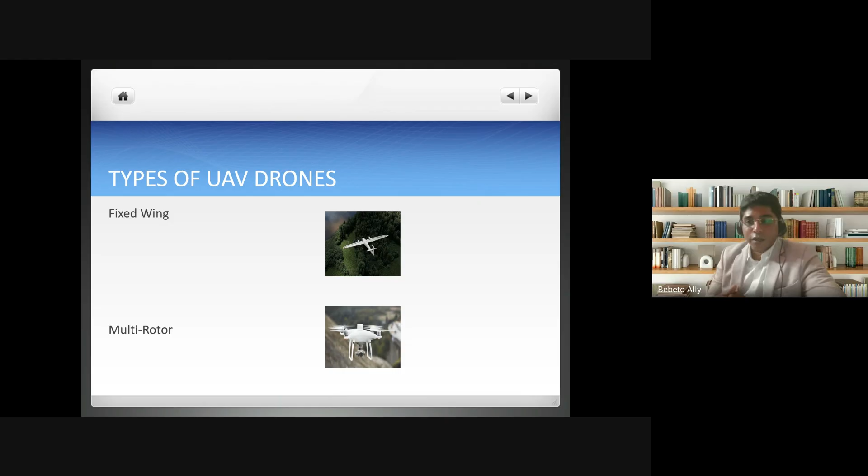As I mentioned earlier, the drone market is going to reach approximately $40 billion by 2026, and it is going to approximately double by 2030, which is $80 billion.

Now, drones are being used in civil and military applications. In the civil sector, we are using it for policing, civil defense, and extensively for agriculture, especially through a few schemes launched by the Honorable Prime Minister, which is the Namo Drone Didi scheme, where farmers, especially self-help group farmers, are being taught how to fly a drone, provided a drone with subsidy, so that they can use agriculture drones instead of manually going into the fields for spraying fertilizers and insecticides, which is very harmful for their health as well.

This is also giving them an employment opportunity, and helping them become entrepreneurs and earn a livelihood from the drone by providing agriculture spray services. They are also being provided with DGCA certification, which stands for RPC, Remote Pilot Certification. It's basically a legal certification or license provided by DGCA to legally fly a drone anywhere across India in civil airspace.

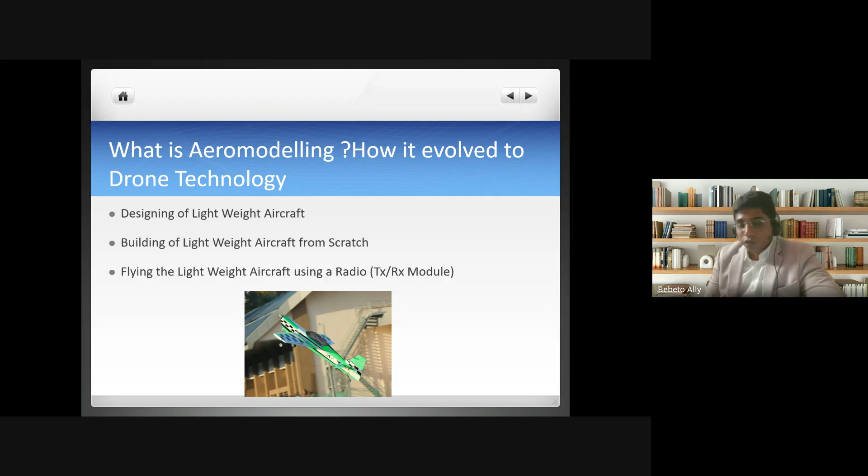Most engineering students might be aware of events organized in IIT called the Boeing IIT National Aero Modeling Competitions, organized across all IITs, with one zonal competition and one national competition held in either IIT Delhi or IIT Madras. This competition is backed by Boeing, and Boeing has been doing it for almost two decades now to promote indigenous development in India.

These model aircrafts are not just for any competition. It is for seeing which of the designs can be taken up for the next proper aircraft design. Boeing comes up with new aircrafts almost every year, taking up new prototypes and new concepts. So all these ideas, the bright minds, are drawn from thousands of designs that come across the country participating in these competitions, which gives them the idea of what kind of aircraft can be made in the future.

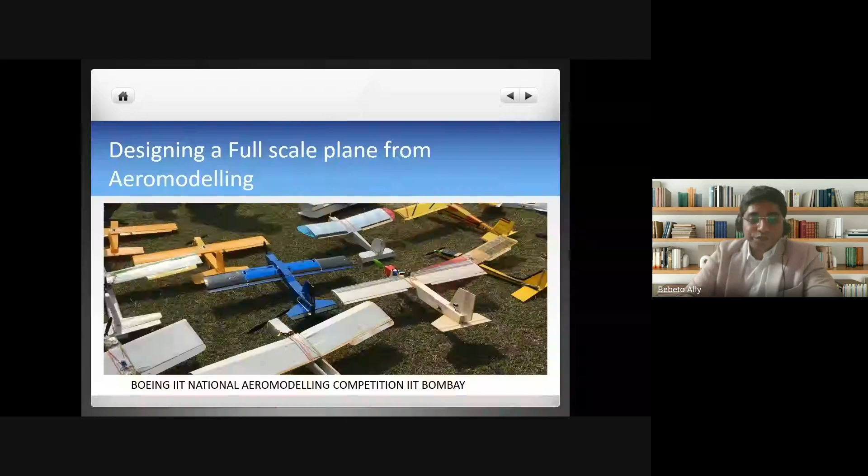In aero modeling, as I mentioned, you need very basic components. One of the first components is the TXRX module, which is a radio consisting of one transmitter and one receiver. The receiver is mounted on the model aircraft. You also have one battery, one BLDC motor, and one electronic speed controller, and that's all that's part of the electronics in a model aircraft for aero modeling.

It's a very simple technology. How it flies, you just need to mount these three things: BLDC and ESC. ESC stands for electronic speed controller, and BLDC means brushless DC motor. These are the three basic components that have been used over the last three to four decades to do aero modeling designs and check the aspects of the aircraft in a scaled down manner, which later evolved into a competitive term, as I mentioned about the Boeing IIT competitions, and also the SAE International, which is held in the US. There are many such events happening over the years. So this is the basic component.

Now, when we had this technology over the years, why didn't we have UAV technology developed the way it's popular today? Why didn't we have it way back, say 15 or 20 years back? Let's move to the next slide.

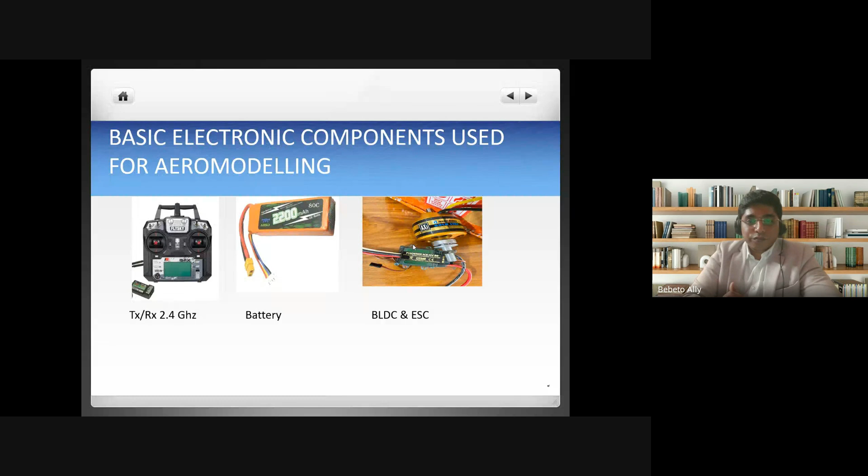So it is something that has revolutionized and made flying drones and aircrafts much easier, which was not possible because all these years without an APM, flying an aircraft or an RC multi-rotor was all manual. It was all about balance, precision, and practice.

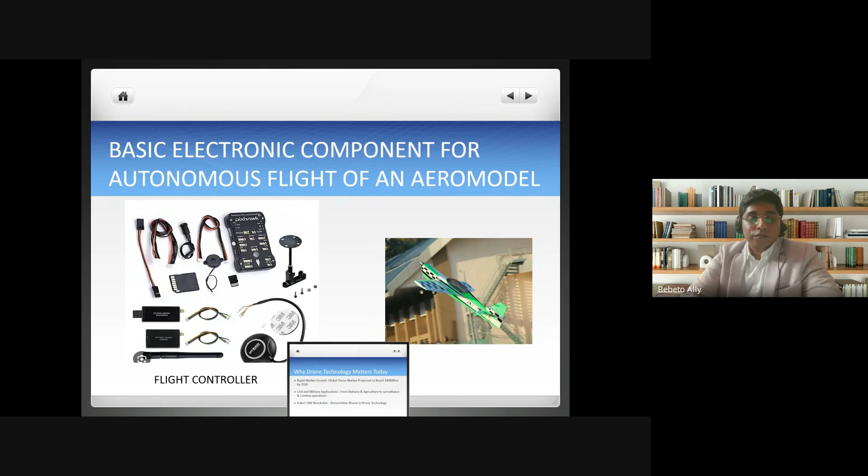As I mentioned earlier, in the early days, maybe 6 to 7 decades ago, we never had such technology, so aero modeling was being done. But today a scaled down model, or sometimes for the unmanned aerial system the exact model, is placed inside the wind tunnel so that we can do such testing.

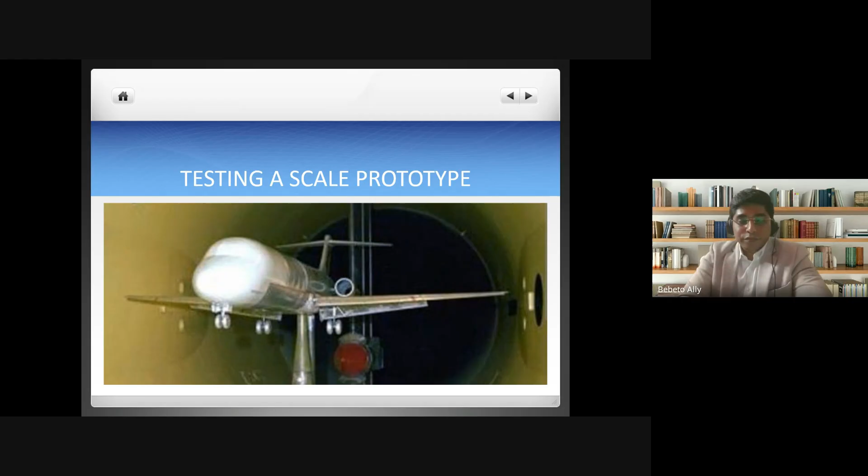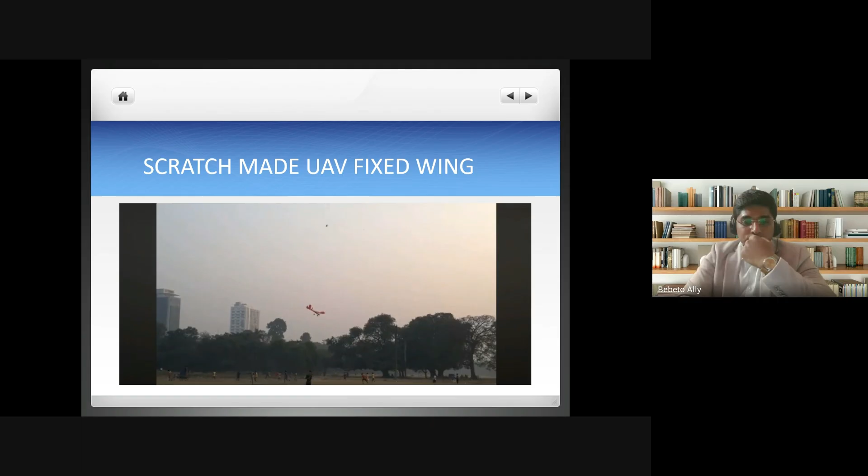As I mentioned earlier, this was manual flying, where you don't have an APM, but it's all about practice and precision. If you don't have practice, you're unable to fly this aircraft. So once the APM modules were innovated, flying such aircraft became easy.

But earlier, maybe a decade ago, students used to make their own planes - this video is from 15 years ago, flown in Kolkata Maidan. This aircraft is all manual flying. In those days, when engineering students made such aircraft, they used to face a lot of trouble flying it because they lacked the flying skill.

But today, after the innovation of the APM, which is auto stable, it does not require you to maintain stability. All you have to figure out is where you want to fly and when you want to fly. So this is where the advantage of an APM lies, and that has revolutionized the industry.

As I mentioned, globally it's a $40 billion industry, which could have been achieved a decade or 15 years ago if we had the same technology - we just didn't have the autopilot modules.

So I'll just mention the types of wings that are there for a fixed wing aircraft. One is the dihedral wing, one is the flat wing - you must have noticed this in trainer aircrafts like the Cessna.

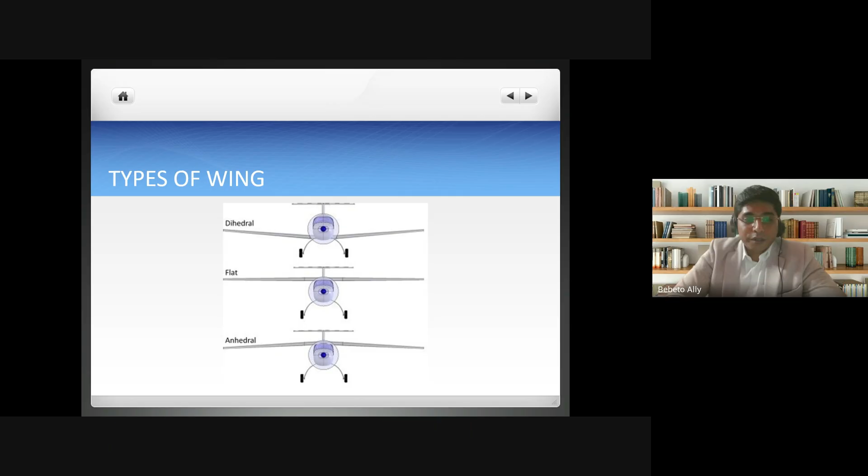So basically, I'll discuss the types of multi-rotor. One is the quad, which is commonly used. It has 4 axes. It is normally used for photography or other small things.

Then we have the hexacopter, which has 6 axes, meaning it has 6 BLDC motors or 6 propellers which help it fly. These are mainly used in the agricultural sector, like agricultural drones. You also have it in defense, and for various other purposes.

Then we have the octa, or 8 axis. This is very rarely found on a large scale, other than for air mobility, like air ambulances and air taxis, which have been configured in octa configuration to generate more thrust.

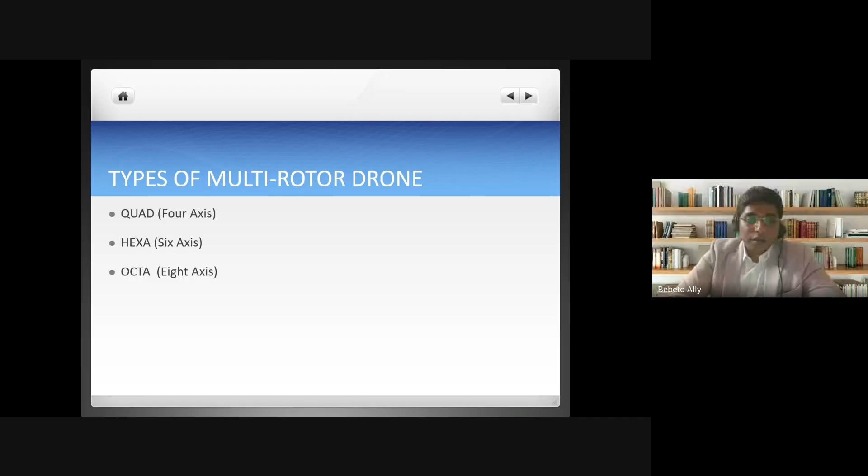So I'll straight away play a video of this heavy lift multi-rotor.

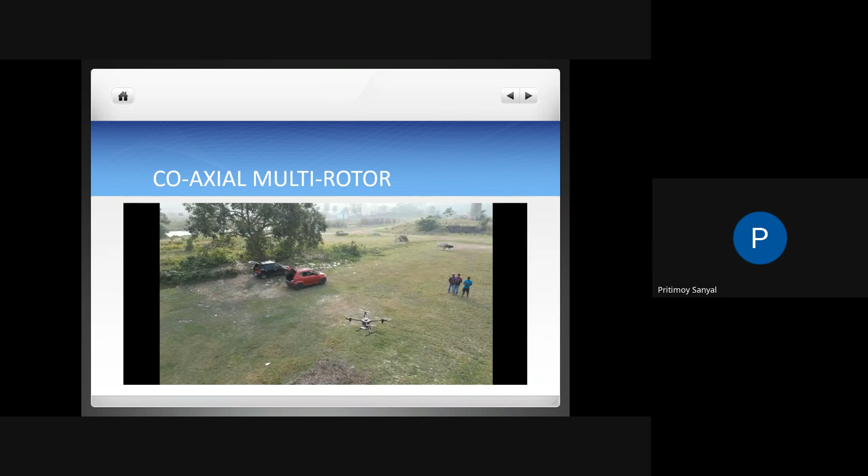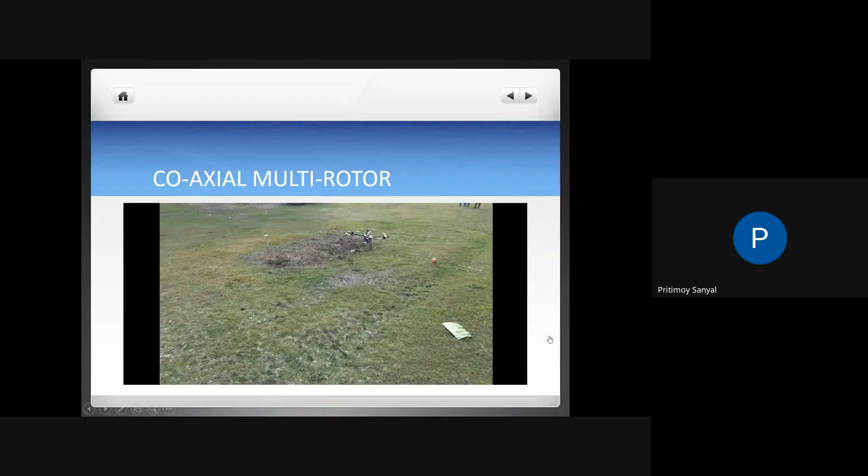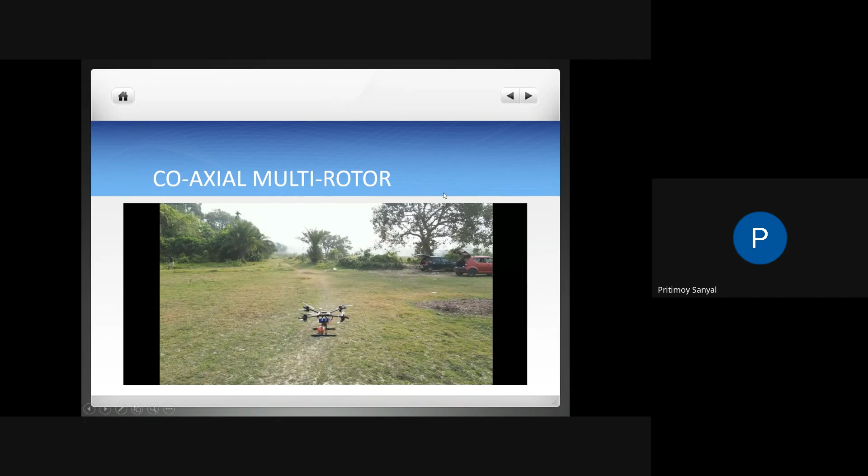Mr. Ally, please unmute your microphone. Hello. Hello, yes, now you are audible. Please, yeah, was the video visible? Yes, it is visible, but there is no sound in this video actually. Sometimes you mute your microphone, so therefore... No, no, there is no sound.

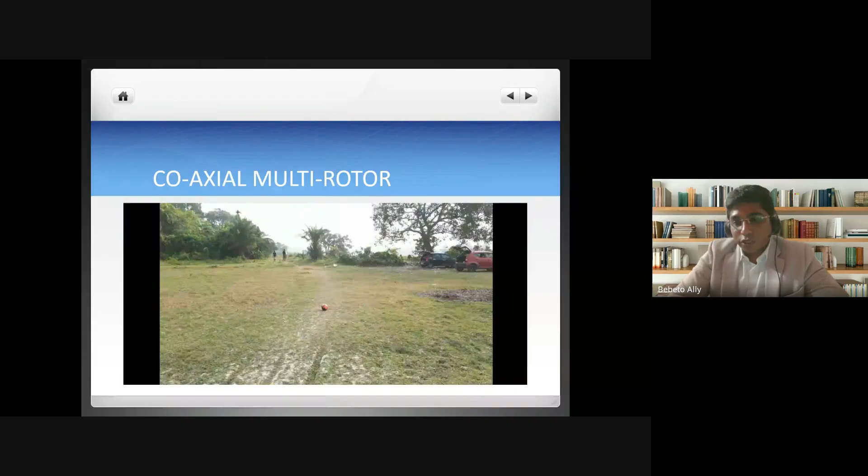As you have seen in this video, this is a coaxial heavy lift drone designed for payload dropping. This drone is capable of lifting weights up to 25 to 30 kg. Right now, it is going to drop a payload of 5 kg. So this is a coaxial configured quad.

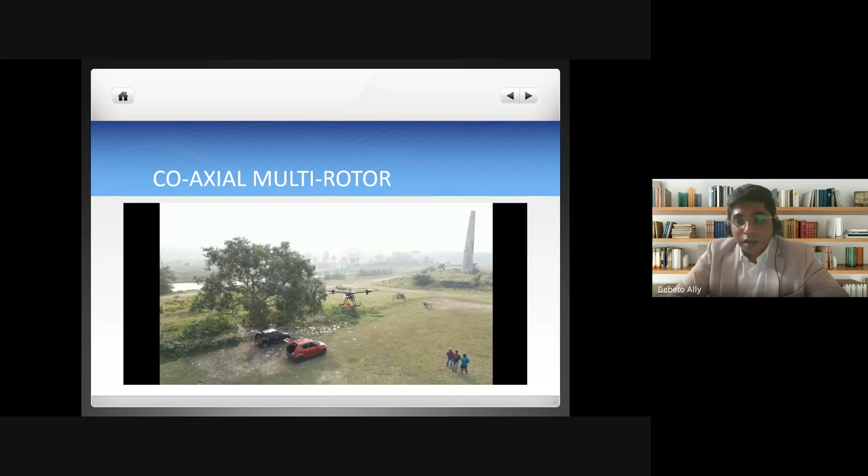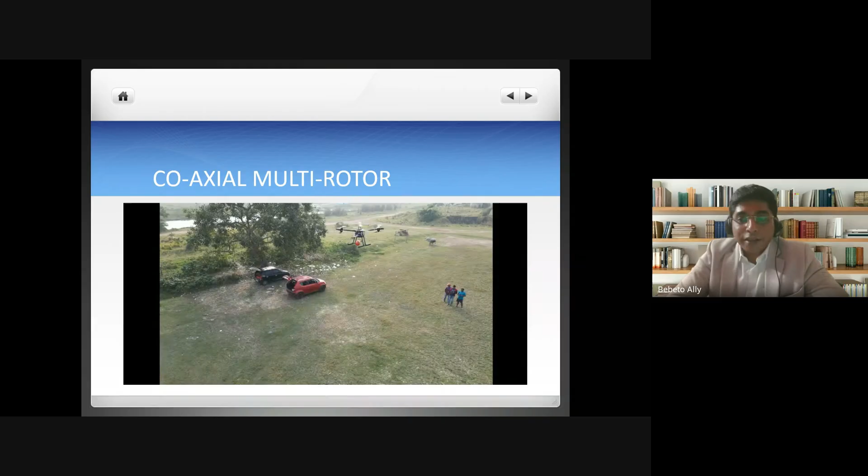As I mentioned earlier, hexacopters are designed for bigger drones, but this drone is designed as a quad in a small configuration while generating more thrust than a hexacopter of its category. So there are various such categories of drones that help you perform your functionality according to your requirement and your flying time.

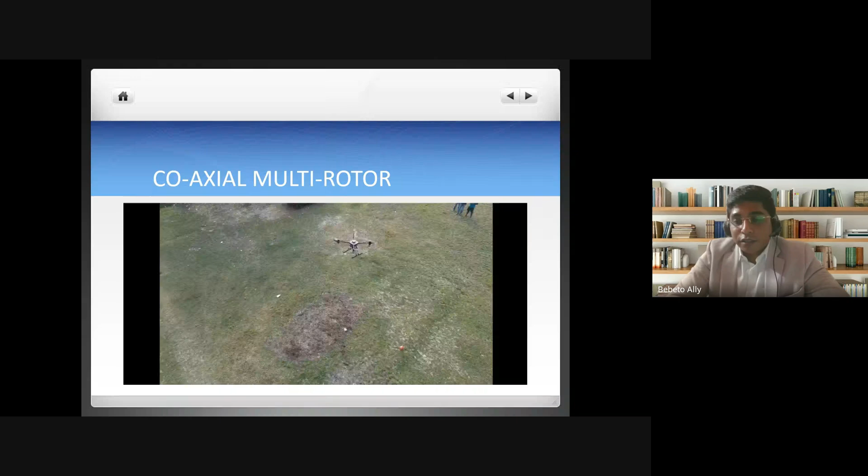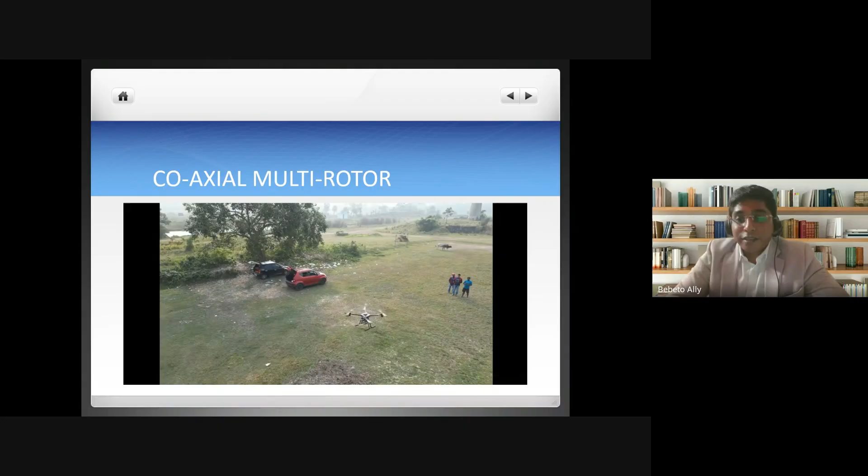So basically, when you design a drone, first you need to think about the structural aspect, the kind of payload, the volume of the payload, and the flying time. It's important to calculate your battery, whether the flying time you're planning for with that payload and structural load your drone can withstand, what kind of battery you'll need, and what your circuit diagram will be.

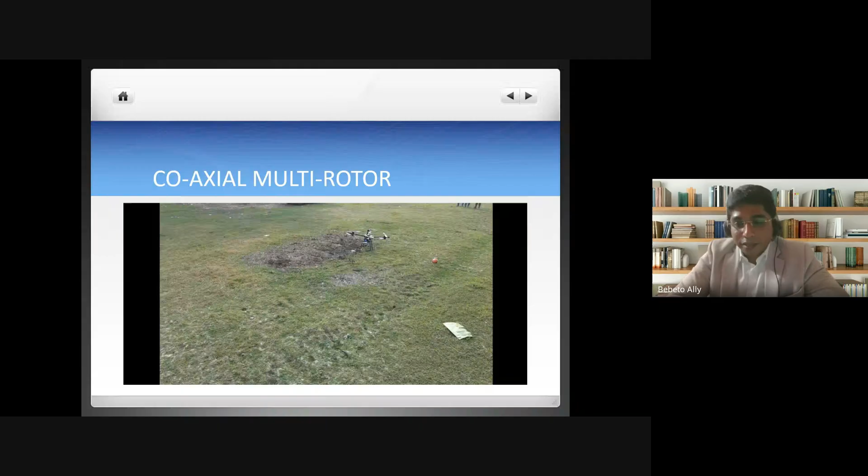So students who are interested, I understand that's why they're attending this workshop today. It's very important to know your requirements and your payload before you start developing a drone. So I'll straight away come to the next slide.

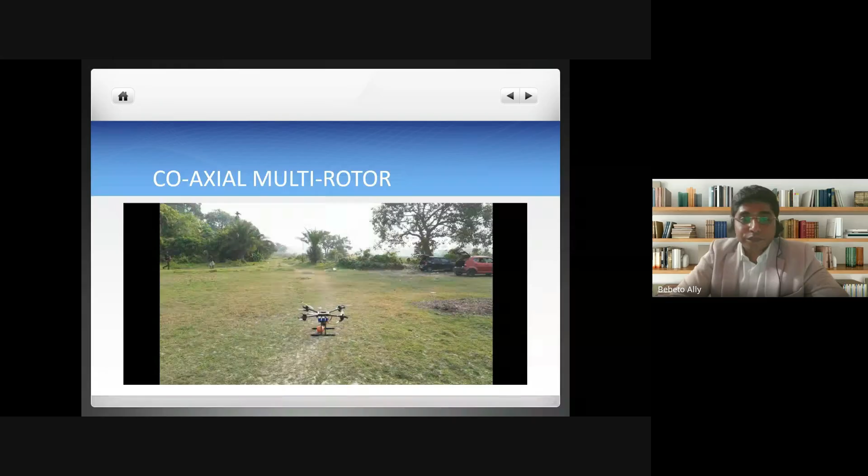So the main electrical components of a UAV, as I already showed you the pictures of the basic components and the autopilot module. I mentioned about the BLDC motors, but there is also one more thing, an IC engine - an internal combustion engine, fueled either by aviation fuel or methanol. These are the two forms of fuel it runs on, but it is very rarely used because we are trying to promote greener technology. But in some defense operations, we need IC engines to gain that kind of speed for supersonic or hypersonic missions, the prototypes of which are in development. For those things we need a more powerful engine. But an IC engine UAV is also used in defense for various purposes.

Now, ESC is an electronic speed controller. As I mentioned earlier, it controls the speed of the motor, getting signals from the RX module. Then you have the autopilot system, the APM module, which is an integrated version with internal gyro and everything, which maintains your flight path for a stable flight - that's very important. Then you have the GPS, which helps you find your location, and it's part of the APM module. Then the propeller and the structural frame. These are the main components of a UAV.

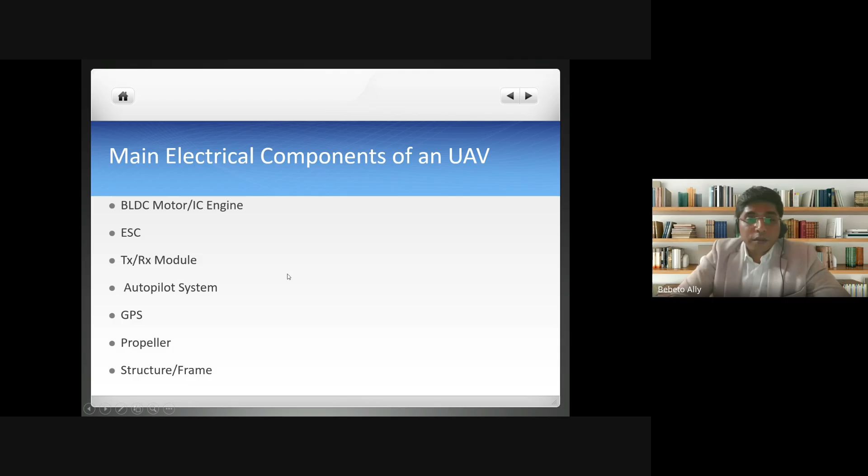So as I mentioned about the materials - aluminum, carbon fiber. Duralumin is used for the landing gear section, which helps maintain structure when landing with a huge amount of payload. So if it's a multi-rotor, it has to withstand the structural load, and duralumin is very useful in that case. Then we also have titanium, which is a bit on the higher side cost-wise, but it's a very good material to construct a drone. But carbon fiber is the most commonly used material in today's drone industry.

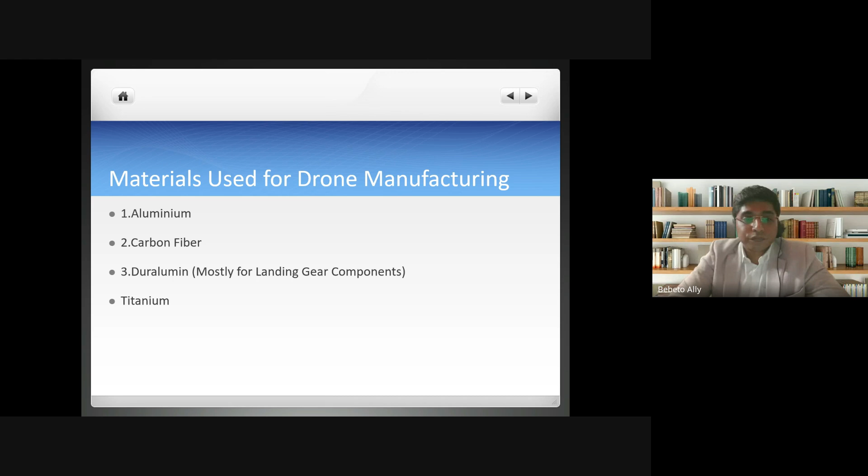So important points before designing a UAV, as I mentioned earlier while the video was playing - payload calculations are very important. You need to understand and analyze your payload, the volume of the payload, before you begin designing the drone. Then you begin designing your drone, be it a multi-rotor or fixed wing, and you need to know what category it falls in. Whether you need to travel a certain distance also matters, so based on that you need to think about the type of multi-rotor or fixed wing, whichever is applicable for that mission. The range is very important as well.

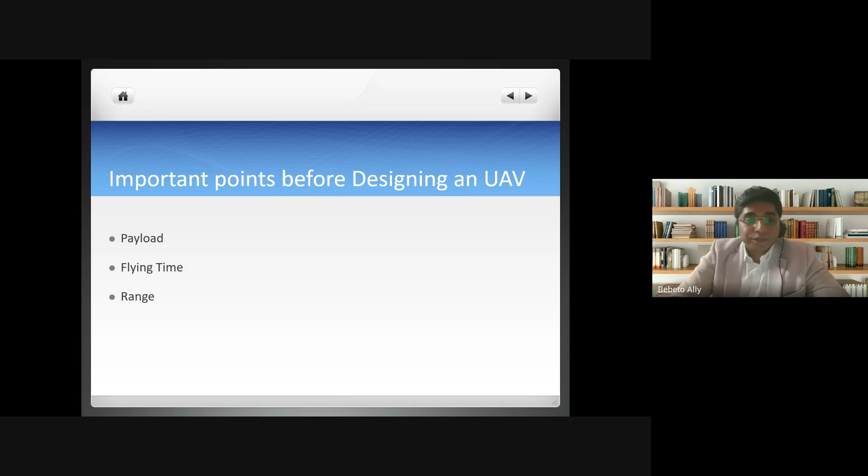So the applications mostly used for multi-rotor are aerial surveillance and photography. Aerial surveillance has become very popular in various industries - used by the police, the border security force, the coast guards, various entities like ports, and in fact today the railways are using drones for surveillance of their property and survey of railway tracks and bridges. It's a very useful tool. Drones have become very useful over the past decade, making things much easier that were sometimes very difficult before.

I'll give you an easy example: the Howrah Bridge in Kolkata, one of the oldest bridges in the country, a cantilever bridge. This bridge needed inspection for structural audit. People had to go up using traditional methods, but now using drones it has become much easier to do structural analysis. Nobody has to go all the way up to check for cracks or rusting. That's how aerial surveillance and photography has helped us do our work much more easily.

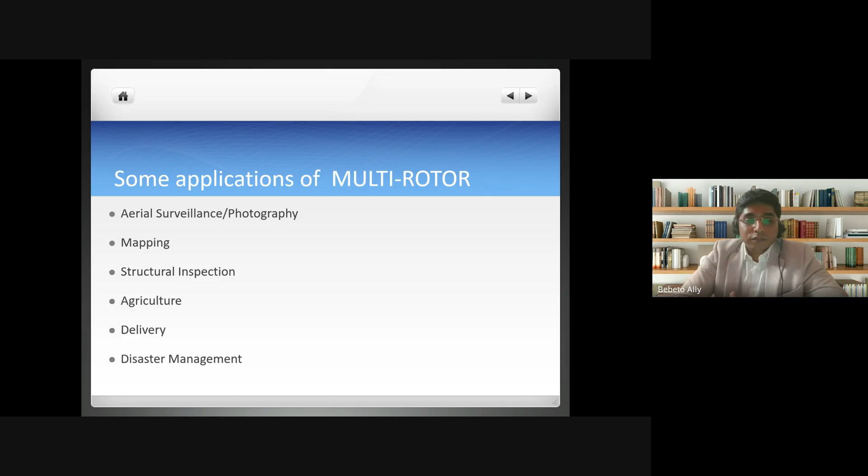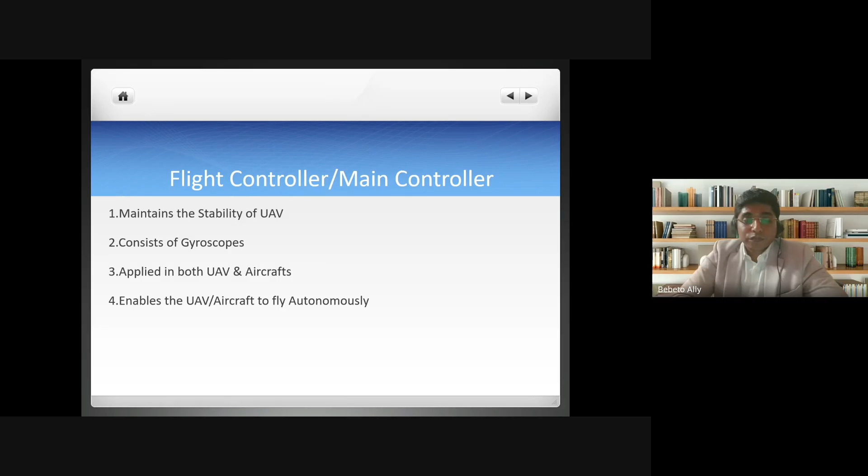Now, understanding the effects of wind is very important, because when flying an aircraft, be it a drone or an aircraft, the wind changes directions. You are going to face updrafts and downdrafts of wind, you are going to face wind gusts, and you're going to fly against the wind, which creates a lot of turbulence. So wind plays a key factor when flying a drone or an aircraft.

Now imagine you're flying a drone next to a pole or a building, and the wind is coming from the opposite direction. When the wind comes in contact at the edges of the building, it creates vortexes, and these vortexes create turbulence when flying the drone close to a building. Our APMs today are configured so that we can fly stable in such scenarios, maintaining stability at such vortexes, especially with updrafts or downdrafts - a downdraft is a nightmare for any pilot, be it in an aircraft or drone, because if it happens at a lower altitude, you get very little chance to recover from it.

So a downdraft is much more deadlier than an updraft. Updraft sends your aircraft up, but downdraft, if you're at a lower altitude, you don't stand a chance to recover.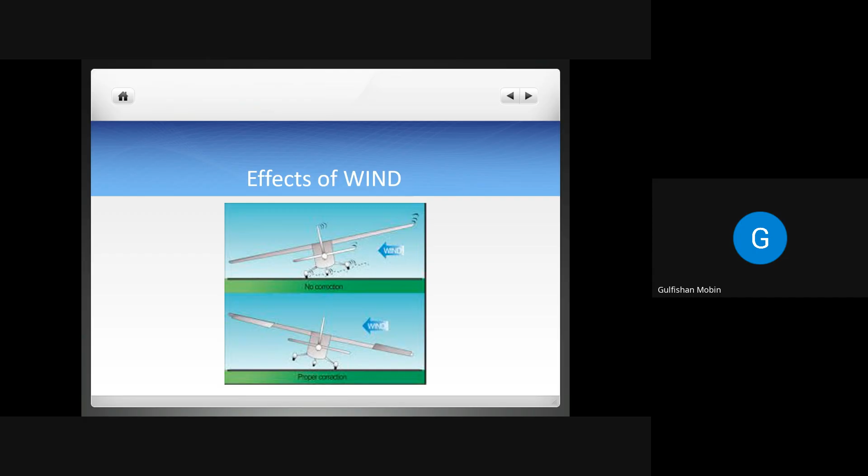So as I mentioned, the downdraft is a nightmare for every pilot. We have to be very careful, and our APM modules today are so stable that we don't even have to worry about such things. But you need skilled piloting to control and get out of these scenarios safely.

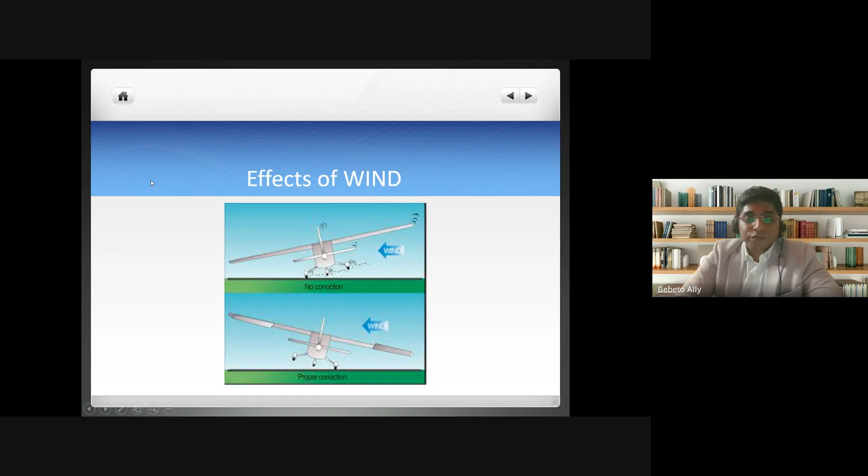So these are the main controls when you fly an unmanned aerial vehicle: yaw, roll, pitch, and throttle. This is a 4-channel TX-RX module, which I showed you a picture of when I began this presentation. Basically, yaw in an aircraft is the rudder, and it helps turn the nose right or left. In case of a drone, it acts the same way - it helps you turn the front part of the aircraft or the drone right or left.

Then there's the roll. In case of an aircraft, the roll activates the ailerons, and you can move the wings right or left. Then you have the pitch, which helps you maintain the angle of attack, whether you want to go up or descend. So these are where the three controls help, and throttle controls your aircraft's thrust, which is very important while you are doing these maneuvers.

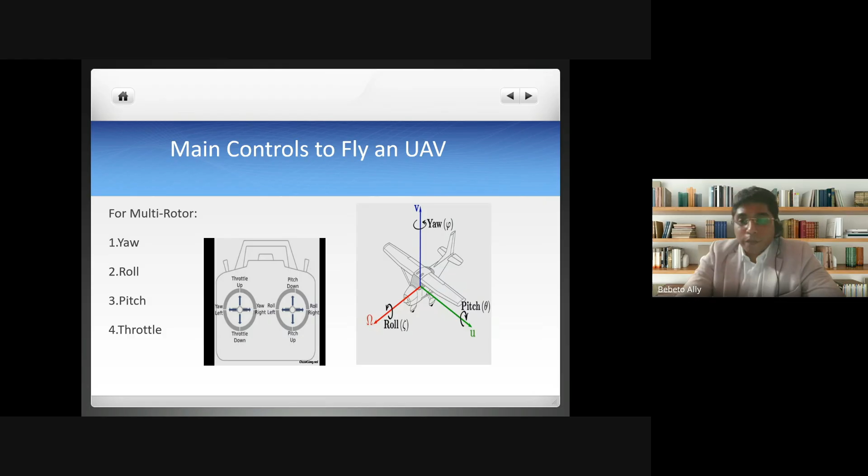Now, there's a difference between the multi-rotor and fixed wing. As I mentioned earlier, training is usually needed to fly a fixed wing, but in a multi-rotor it's easy to control and maneuver because both have APM. Fixed wing requires more training because of its speed, and you can't land it anywhere - you need to learn how to land it and take it off properly and safely.

Then you have to know about the ability to hover. In fixed wing, you can't - you are unable to maintain a fixed position, so you have to land it. As I mentioned earlier, you need to select a proper landing strip so that you can land it safely. So these are some of the key differences between a multi-rotor and a fixed wing.

But there is also one more category which combines both: a fixed wing with the capability of landing and taking off from the same location. That's basically VTOL - vertical takeoff and landing fixed wing. It is a combination of multi-rotor and fixed wing, and it can do both together.

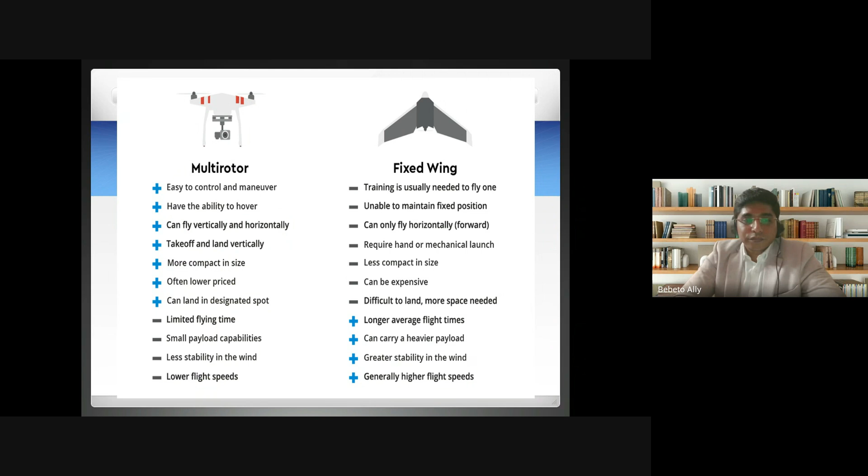So to fly a drone or an unmanned aerial vehicle in India, you need a DGCA certification and license, which is the remote pilot certification from DGCA, so that you can legally fly a drone anywhere across India. There are basically 3 to 4 categories of certification.

One is micro, which is for very small drones, from 250 grams up to say 2 kg. Then you have the small category from 2 to 25 kg. Then the medium category from 25 to 150 kg. Then the large category, which is above 150 kg - you can go up to say 500 kg or even a 1 ton drone, but that's for the large category.

But to legally fly any of these drones, especially the medium and small categories which are very popular, you need a certification from DGCA through drone academies - we have almost 100 drone academies across the country - so that you can get your DGCA certification and legally fly a drone anywhere in Indian civil airspace.

I'll also be discussing the aerospace part apart from drones, because aerospace and aircraft have helped us gain the R&D and knowledge of how an autopilot can function, and given us key ideas about how an unmanned aerial vehicle can function. From aero modeling, the evolution happened to the unmanned aerial system. Aircraft gave us the key vision that anything unmanned can also fly. I'll begin with the types of aircraft straight away.

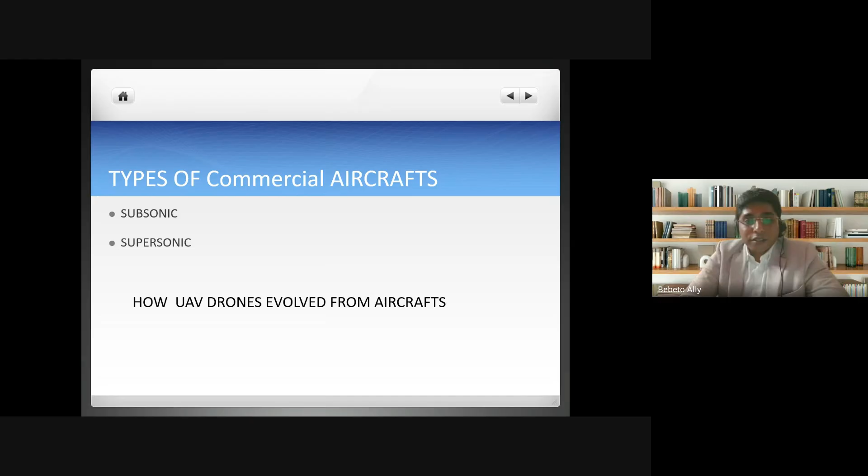I'll come straight to the first slide in this category: supersonic aircraft Concorde. This was in service for 27 years, and it was the world's first and only commercial aircraft that used to fly at Mach 2, with a top speed of 2,179 kilometers per hour, twice the speed of sound. This aircraft was the first and only of its kind operational for 27 years for commercial flying.

Usually you will find supersonic aircraft with the Air Force and defense all across the world, used for military purposes like combat. But this was the sole aircraft of its kind for its time, which retired in 2003.

It was providing services between New York and London. Travel time today is somewhere around 8 to 9 hours; in those days it used to be 3 to 4 hours depending on weather conditions. That was the fastest time you could reach between London and New York. This aircraft first flew in 1969 and was in service from 1976.

This aircraft faced several challenges during its production and service. There was an air crash in the year 2000 at Paris Charles de Gaulle Airport. Moments before it took off, another aircraft had dropped debris from its wing, which was lying on the runway.

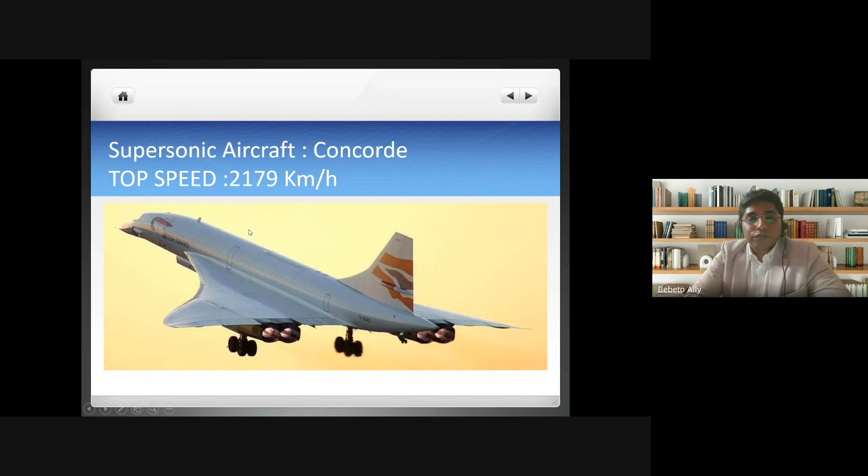These are some of the problems that were faced with the Concorde as well, or when you see a fighter jet flying at supersonic speeds. The most common problem is a sonic boom, which is very dangerous if it happens over a city. That's a main reason why the Concorde was never allowed to fly over cities, only for overseas operation at supersonic speed. When flying over cities, it was supposed to fly at subsonic speed.

Now I'll discuss what a sonic boom is. When you're flying above the speed of sound, you're crossing the sound barrier, and this creates an explosion when flying at an altitude of, say, above 30,000 to 40,000 feet. Even at lower altitudes, this sonic boom is so loud it can shatter the window glasses of your house, and even damage your ears.

This has happened in the past, and that is why even today, Indian Air Force aircraft approaching a city don't fly at supersonic speed. They're only allowed to fly supersonic at altitudes above 49,000 to say 59,000 feet. At lower altitudes it's very harmful when flying over a locality, so a supersonic boom is extremely dangerous.

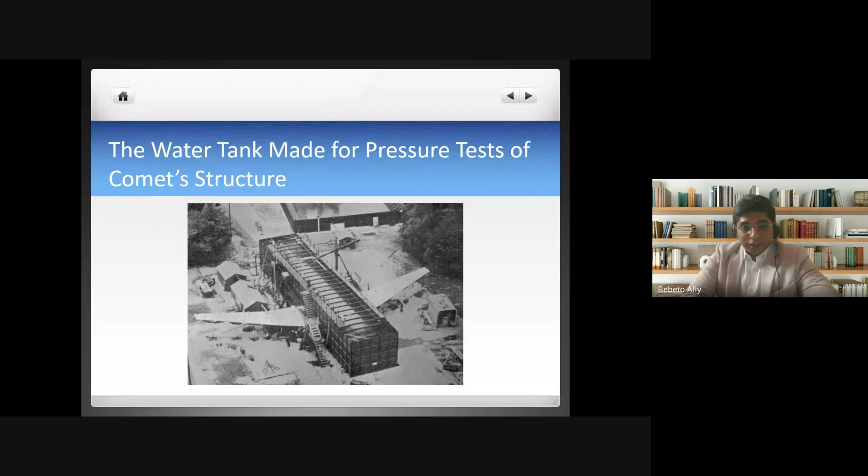I'll just straight away play the crash of the Comet in 1953. That happened in Calcutta. It's an archive video from the news bulletin.

Of the Comet disaster near Calcutta. Wreckage of the aircraft smashed almost beyond recognition. Statements taken from local eyewitnesses indicated that a particularly violent storm may have been the cause of the crash. At the time of this terrible accident, the aircraft carried 37 passengers and a crew of 6. All lost their lives. The first fatalities of the Comet passenger services, which had previously carried 28,000 passengers safely. There were many tributes.

As you've seen in the news bulletin, they mention it was a storm, although when it was identified what the actual cause was, four such crashes happened globally in that very same month, because at that time the Comet was completing almost 1.5 years of service in global travel. At the very same time, all the aircraft were completing the same number of cycles of flying and were failing at the same time.

At first it was considered a normal weather fault, because in those days aircraft were not designed to fly through normal or basic storms. But when the tests were conducted over time, and investigations were conducted, they learned that it was a structural failure which had happened, and this aircraft had crashed down in Kolkata.

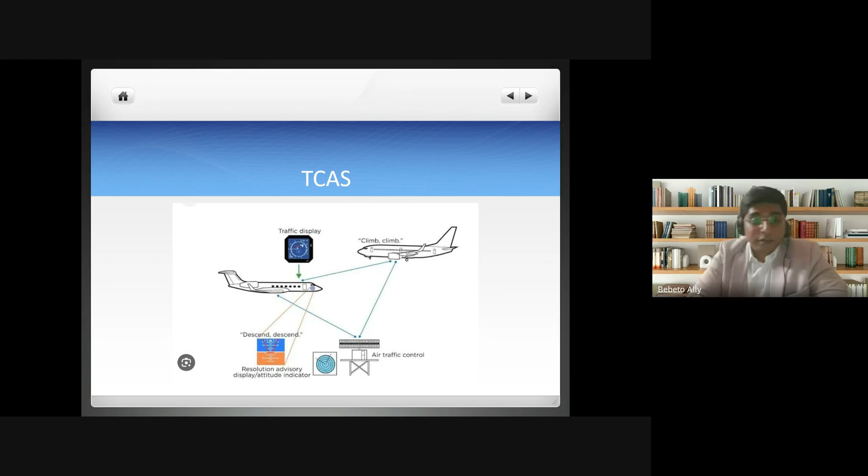Now I'll come to the MCAS system. This is a very important thing, the Maneuvering Characteristic Augmentation System. It has a very important role in both aircraft and drones. You must have heard about the Boeing 737 Max incident. I think two or three Boeing 737 Max aircraft crashed because of what was stated as an unknown reason, but it was basically the failure of the Maneuvering Characteristic Augmentation System sensors that give readings to the system.

The sensors had failed and were giving faulty readings, and based on that, the MCAS reacted and crashed the aircraft. Now I'll explain what MCAS is and why it was installed in the Boeing 737 Max. As you know, the Boeing 737 series is one of the oldest series of aircraft manufactured by Boeing.

So we had Boeing 737 NGs, we had Boeing 737 dash 8. Then recently, in launch, is the Max variant, which has a larger engine. When they mounted the larger engine, they had to mount it quite ahead of the fuselage, which resulted in a shift of the CG point of the aircraft.

To compensate for that change of CG, once it's shifted, it means the aircraft, when flying normally, will try to pitch its nose downwards. To control this automatic movement, which happens according to the laws of motion, they added one more system. They developed the MCAS, the Maneuvering Characteristic Augmentation System, to control this unnecessary pitch down due to the change of CG. Although this didn't directly result in the crash, the installation of faulty sensors did.

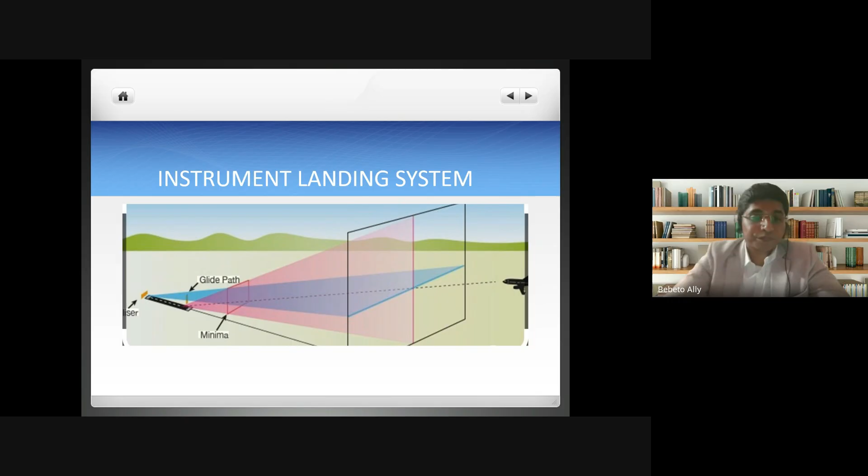So it's just a scaled down version of the actual autopilot system of an aircraft. This is where the evolution and conceptualization of these scaled down models, which today we call unmanned aerial vehicles, started, and it has proven to be very effective. It has revolutionized the UAV industry, from fighting wars to agriculture to photography to disaster management. We have a huge aspect of working using unmanned aerial vehicles for such uses.

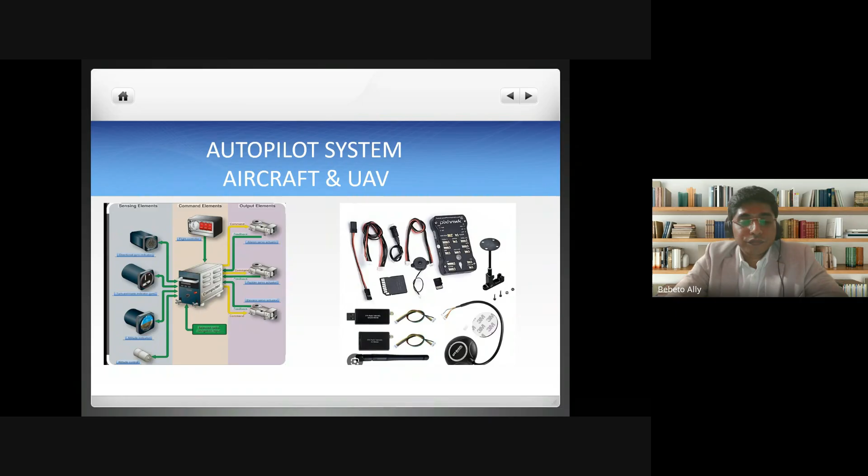So let's begin the discussion about the heavy lift UAV drones. There are basically two categories of heavy lift drones. One is the multi-rotor category, as I'd shown you in a video a few slides before, the coaxial configuration - this is a heavy lift multi-rotor.

Then you have the heavy lift fixed wing, which is for combat. This version of the fixed wing has been used by the US for nearly two decades now. So these are the two types of heavy lift UAVs, which are capable of lifting weights, sometimes payloads above 100 to 200 kg as well.

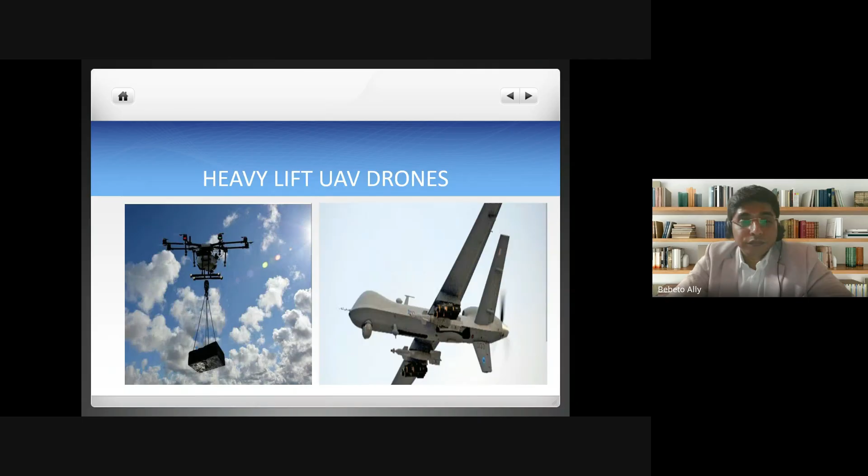These are some of the applications of a heavy lift drone: agriculture, delivery, defense, disaster management, and firefighting. I have a wonderful presentation for firefighting waiting a few slides ahead. I'll show you how firefighting drones are going to revolutionize the future of firefighting in high-rise buildings as well as forest fires, like the recent fire in California.

In fact, there were forest fires recently in Manipur too, I guess. Such fires need to be dealt with very carefully. So I'll just straight away get to those slides.

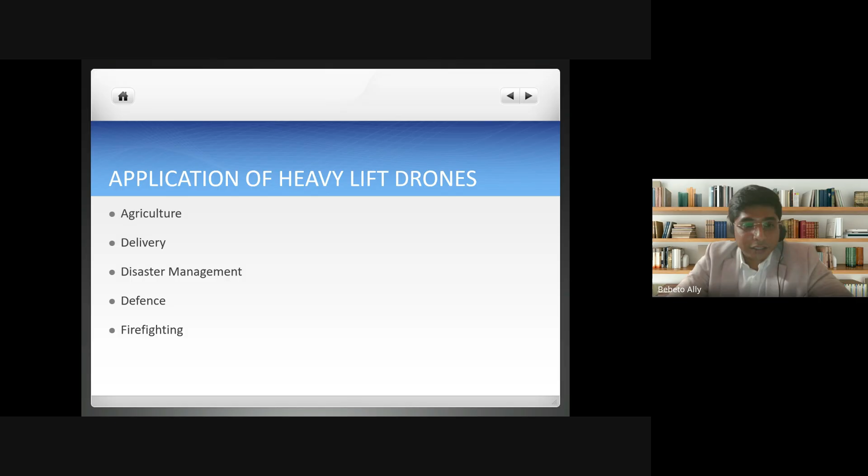That sounds quite shocking - that it took 40 minutes to reach, although being just a kilometer away, the headquarters being a kilometer away. There are multiple reasons for that.

When it comes to height, the fire department relies on ladders, and ladders are very heavy and large equipment. They're based on a big truck - it's a trailer-based truck, and it takes time to travel through city traffic. You need to maneuver it, and then it requires space to assemble.

In that case, this area was very much congested. There were parked vehicles, so they had to move the parked vehicles, make space, cut down trees because one branch was obstructing, and eventually they could give the first response only after 40 minutes.

So this gap - because the building was empty, it was on holiday, there was no loss of life reported. And being the top floor, the loss of property was also less because it was on one of the top floors of the building that the fire had engulfed.

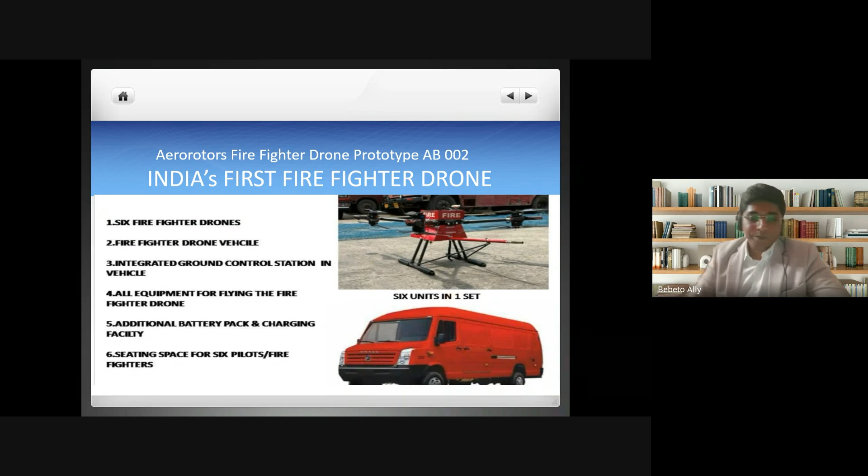This is the firefighting drone, which will over time help us tackle this kind of deadly urban high-rise fire. This particular drone is designed as a heavy lift drone, which I showed you in the video in the very first slide. This is a different, more powerful version for the firefighting operation.

This particular drone is designed to lift the hose, the firefighting hose, from a fire tender. So it doesn't carry water—the water stays on the ground. The fire tender on the ground is used as a source of water and pump. It pumps the water through the pipes, and what the drone does is similar to what was done by a human firefighter, who used to carry the hose up and then spray the water. Now the same work is done by the drone.

Now, when lifting a hose of this kind, you are going to deal with a certain pressure—you're dealing with back thrust when spraying pressure up to 6 to sometimes 8 bars of water. Maintaining this pressure and the discharge of water, sometimes 400 to 800 lpm—lpm stands for liters per minute—so 800 liters per minute.

Then there's the wind, as I mentioned earlier—when flying close to a building, the updraft, downdraft, and the vortex especially, which is always next to a building, becomes a huge challenge. But firefighting drones have evolved over time, and today they are successfully ready for operations, although they will begin actual operations at a later stage, over the years.

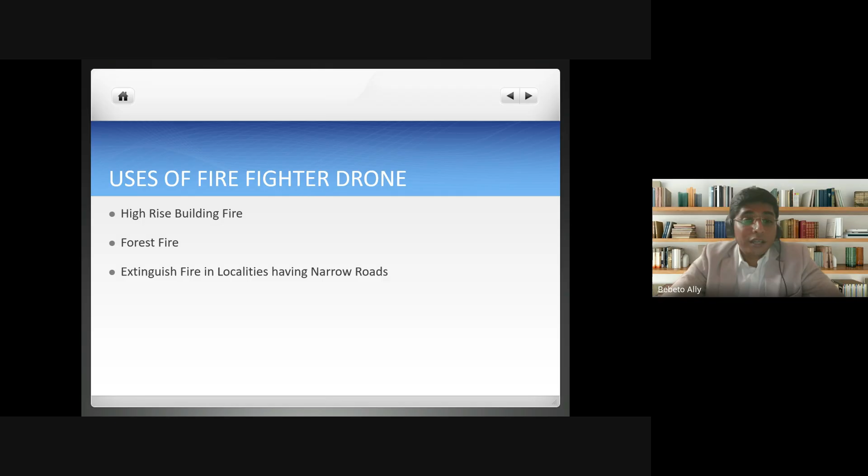It may be a fixed wing or a multi-rotor mounted with a weapon, and all it is designed to do is deliver the weapon to a designated place, or drop it. Like a fighter jet launching a missile, similarly a fixed wing aircraft launches a missile through it. And it's all unmanned.

You must be aware that Group Captain Abhinandan was captured when his aircraft crashed in Pakistan, and he was eventually caught by the Pakistani army, and later brought back to our country safe. But to prevent such situations, instead of having a real aircraft with a human flying, this is where you see the benefit of having an unmanned aerial vehicle doing the job for you. Instead of anyone physically going and any harm happening, the harm will happen to the device itself, the aircraft itself, but there will be no human harm.

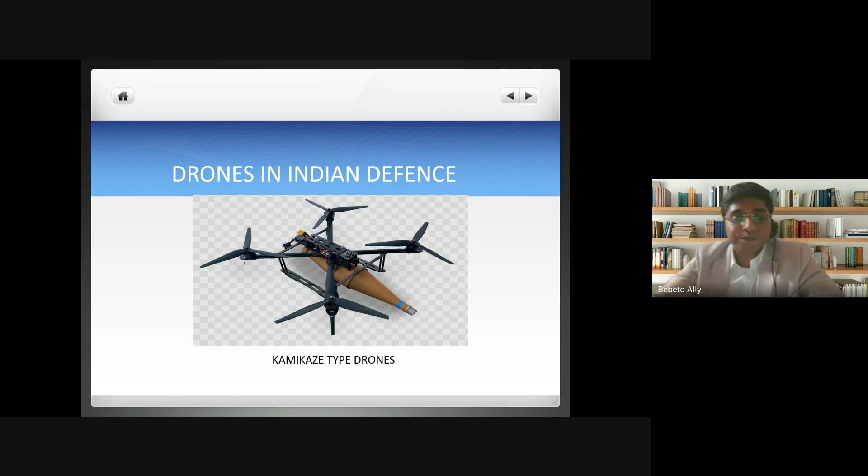Now I'll come to some basic DGCA regulations, which are very important when you want to fly a drone legally in India. But before that, since we have many engineering students here, if you're developing any project for research and development in UAV systems, you don't need any such certification, because DGCA has guidelines allowing you to make a drone for R&D purpose only. You cannot use it for commercial purposes, but for R&D you can fly and test it. You don't even need a pilot license for flying an R&D drone.

But that should be within a green airspace. It shouldn't be somewhere near an airport or where there are restrictions. You must always be aware that it's not a red zone. Red zone in the sense, you have to go to the DGCA portal, and there is a part called Digital Sky of DGCA, which maintains the drone zones.

In that map, you have to check the exact location, maybe from an institute where you're flying, whether it's in the green zone or not. If you see it's in a red zone, then you are not supposed to fly there. You have to search for an alternate green zone in that map so that you can safely fly the drone.

Now let's begin the drone classification. There is a nano category, up to 250 grams, then micro, 250 grams to 2 kg — nano and micro categories. These are widely the categories where DGCA certifications are not mandatory. These are mainly for basic uses, mainly for aero modeling categories; they don't need a license for hobby flying and all.

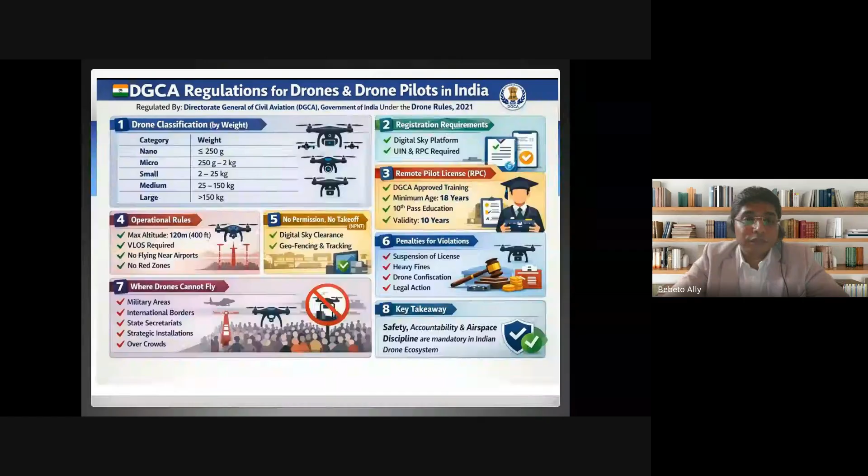So I'll come straight to the UAV job opportunities for engineers and pilots in India. It's not just that you need a drone pilot license to be part of this industry — there are certain other requirements for development, R&D, and the software part. As I mentioned before, our mission is to focus on Atmanirbhar Bharat, so that we can become Viksit Bharat by 2047.

To achieve this initiative, we still don't have a proper indigenously developed APM module. That's where the real problem starts — we still depend on APMs, the autopilot modules developed by other countries, and we have to get it from them.

Getting an indigenously developed APM module is very much important, to become 100% Atmanirbhar, made in India or make in India product. So we need software engineers who can develop the autopilot modules properly, and we also need UAV system integration engineers for the hardware and software system to be successful.

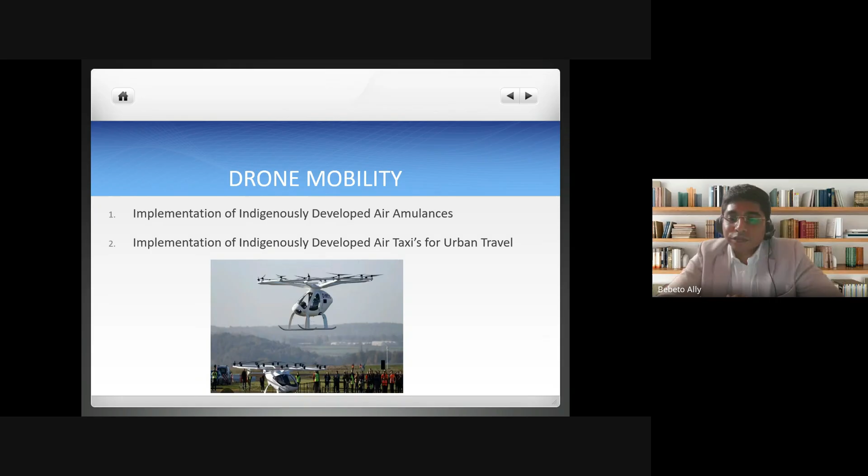Deepokash Paharia typed the question: can you explain the function of IMU, the inertial measurement unit?

So, as I was discussing about the TCAS and the MCAS system, the IMU is a device that measures when the center of gravity of the aircraft is shifting - basically the payload shifting of an aircraft.

It's designed to measure many such aspects, but particularly the payload aspect of the aircraft. You must have seen aircraft like the Boeing 747 cargo versions - when the cargo is lifting heavy loads, although tied properly, if by any chance the cargo shifts during flight, especially during takeoff or landing, the IMU is responsible for doing a quick inspection of the device.